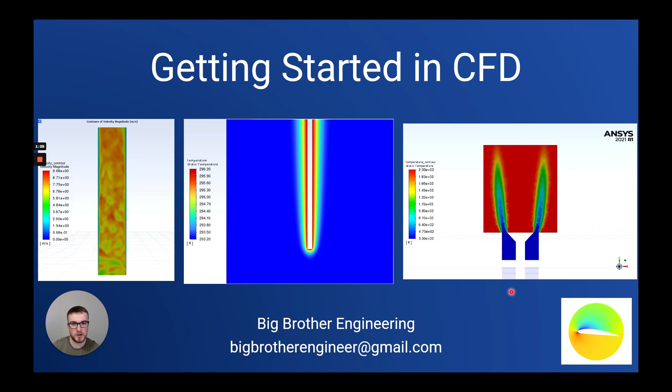So what we're going to talk about today is what CFD is, the process of reducing a real life problem that you see in everyday life into a CFD problem. We'll talk about how the finite volume method works and how we obtain results using it. We'll talk about some applications of the technology, even though they're so wide it's hard to name them all. We'll talk about some of the errors involved in reducing a real life problem into a CFD problem. Then we'll talk about what you need to know to enhance your CFD career, and where to start in your CFD journey, whether you're a beginner, someone who's run a couple of simulations and doesn't know where to go next, or someone who's run multiple simulations and needs further knowledge in a particular area. So we'll talk about what I'd recommend as a process for further enhancing your knowledge in CFD.

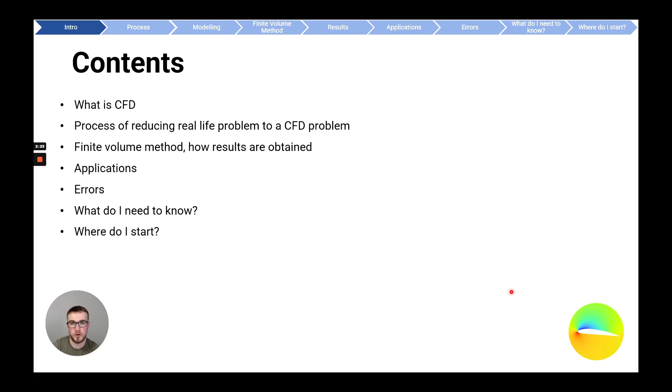As an introduction for complete beginners, CFD, or Computational Fluid Dynamics, is the process of solving a fluid dynamics problem by dividing it into discrete volumes, in other words, cells. Imagine every fluid flow is governed by a field - a velocity field, a pressure field - where we have a solution at every continuous point. Instead of trying to solve for the velocity, pressure, or other quantities at every single point, we divide the domain into chunks and solve it at discrete points. So rather than solving for the whole fluid solution, we divide the domain into little chunks and solve the quantities of interest at these chunks.

The center of these cells are called nodes, and this is typically where we get our solution for finite volume techniques in general, at the cell centers. So what CFD does is take our domain, divide it into little chunks, and use the finite volume method, a numerical method, to solve for the quantities of interest at the cell centers.

You may have heard of the finite element method before, which is often used in structural mechanics to solve FEA problems. The difference between FEA and CFD is that FEA typically solves the equations at nodes at the edges or corners of the cells. The reason we use the finite volume method in CFD over the finite element method is that in the finite volume method, all quantities are inherently conserved directly. What I mean by that is we integrate the equations over each individual cell to ensure that mass, momentum, and other quantities we want conserved are conserved, and this is important for fluid flow problems. So this is typically why CFD applications use the finite volume method over the finite element method - quantities of interest are conserved in the cells, which is a big advantage for fluid flows.

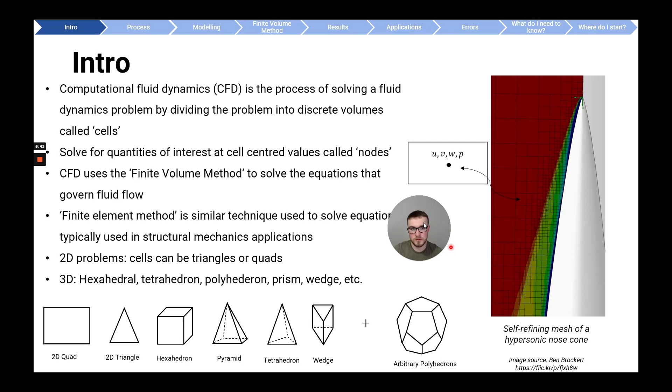Okay, so what is the process of taking a real life problem and reducing it into a CFD problem? I really like going through this process in my head because it helps me ensure that I'm understanding what the CFD problem is actually solving. I'd encourage you to go through this process yourself, take a look at everyday examples you see in real life and ask yourself how you could reduce that into a CFD problem.

So here is an airplane wing. If we want to reduce this real life problem into a CFD problem, there's a couple of steps we have to take. Of course, this airplane wing is very, very complex. We have unsteady flow, we have trailing edge vortices at the edge of the wing. If we take a look at the geometry, it's very complex with lots of nuts and bolts. So we're going to make a lot of simplifications and assumptions in order to reduce the problem into something a little bit easier to solve.

So we'll make modeling assumptions, geometry simplifications, and some simplifications on the boundary, such as constant velocity and pressure, in order to simplify the problem into a model problem. A model problem is something you can conceptualize in your head or draw on a piece of paper with a pen, and it's typically a real life example just reduced down to something a little bit more simple.

Typically model problems are what you would solve in university, etc., where you would assume maybe steady flow, reduce the geometry to something more simple, reduce the forces into particular components that are easy to solve. So a model problem is something you can imagine in your head, a concept, or draw on a piece of paper, and this is a simplification of reality.

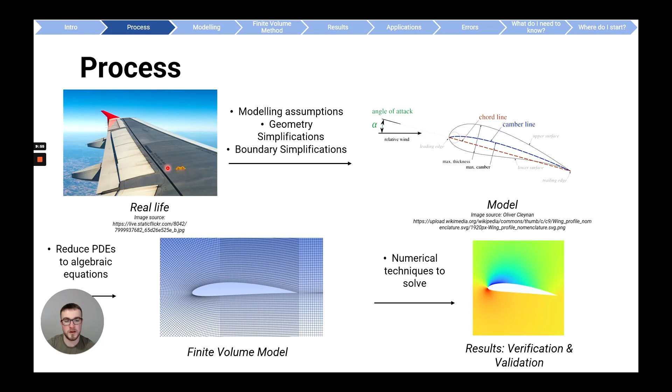So you can see there's a lot of simplifications and assumptions involved in going from a real life problem all the way down to a CFD problem, where in this case we have a 2D airfoil representing a real life airfoil. So there are lots of assumptions and simplifications made in the process of going from a real life problem down to a CFD problem.

So let's talk about the modeling process.

So the modeling process is where we take our real life problem and make some simplifications. We neglect things that might not be as significant in the flow or environment, and we reduce it down into our model problem that we might conceptualize in our head or draw on a piece of paper.

And model assumptions might be, for example, assuming steady flow. So if an airplane is flying at constant speed, it would be a pretty good assumption to assume steady flow, that at time 10 seconds and at time 100 seconds, the flow is going to be pretty much the same on this airfoil, so we would assume steady flow.

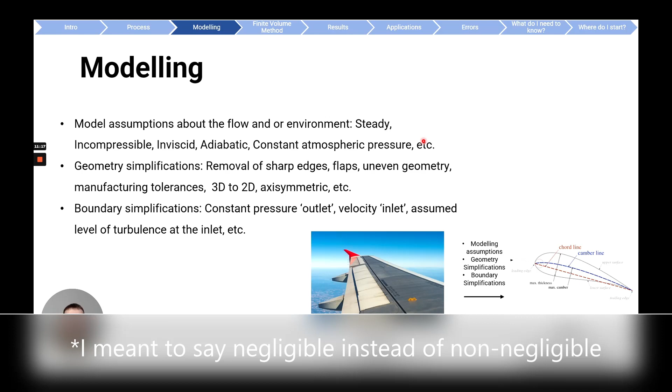Other examples would include incompressible flow if there's no large density changes, adiabatic flow if there's no large temperature gradients and no heat transfer, inviscid, etc. So this is essentially the process of taking negligible effects and reducing that into our model problem - steady flow, adiabatic, etc.

We also have some geometry simplifications that make the problem far easier to solve. So for example, if we look at the airplane wing with all the complex structure here - the flaps, the nuts and bolts, other parts attached to the wing, the aircraft engine - if we were modeling this in CAD, we might just model this wing as a flat piece, nice and smooth, just to simplify the problem and make it far easier to solve.

So we might remove some sharp edges, flaps, uneven geometry, and we'll neglect manufacturing tolerances. If the geometry is symmetric, we might make an axisymmetric geometry, etc. So we will reduce the geometry from something complex into something a little bit more simple in our model.

And lastly, we'll make some boundary simplifications. So typically in CFD, you use a constant velocity inlet, which would have a constant velocity at some point upstream of your part, and a constant pressure outlet. These velocity inlets and pressure outlets will assume constant pressures, constant velocities, and constant levels of turbulence.

So this is some simplifications about the surrounding flow and the boundary conditions around the flow that'll make solving the problem just that little bit easier.

So how do you decide what assumptions you can make if you're taking a real life problem and reducing it into a conceptual model? What assumptions can you make? I would highly recommend asking yourself: what is the output of your simulation? That will help you in determining what assumptions you can make.

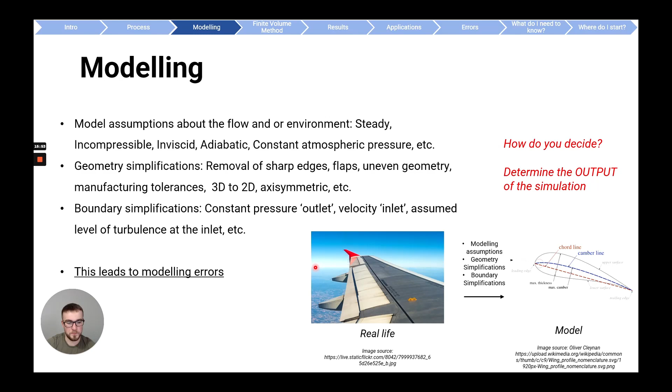Okay, so once we have our conceptual problem, which we might have thought about in our head and drew on a piece of paper, then we have to reduce it into a finite volume problem. So how do we do this?

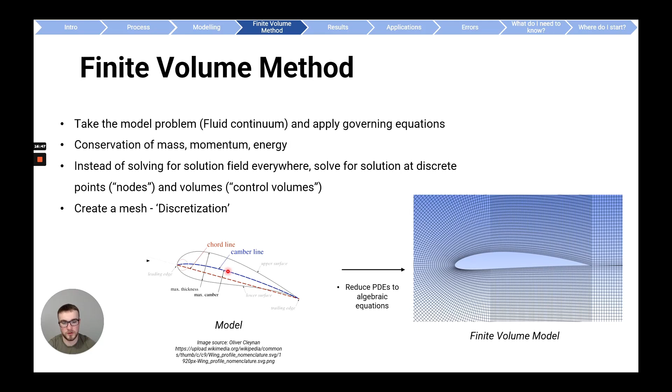We discretize the domain into small chunks. We take our fluid continuum and apply the governing equations to each of these little chunks—this is the process of CFD. Instead of solving the solution field everywhere, we solve it just at these discrete control volumes. This process of dividing the problem into little chunks is called meshing or discretization, where we reduce the partial differential equations into algebraic equations.

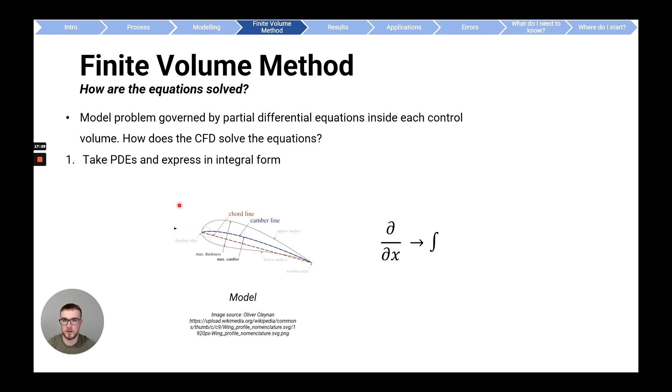So how do we get results out of our finite volume solution? The goal is to take our partial differential equations and create a set of algebraic equations. We do that by taking the equations that govern fluid flow—the Navier-Stokes equations and the continuity equation—and converting them into integral format.

The next step is to integrate these governing equations over each cell volume to form a set of algebraic equations. This is what makes the finite volume method conserve quantities, because we integrate the governing equations over each cell, ensuring that momentum, energy, and mass are conserved in that volume.

By integrating the equations over each cell volume, we now have the governing equations in integral form, and these integral equations are exact—they give the same solution as the partial differential equations. But once we have the integral equations, we can reduce them into algebraic equations.

When we take the integral equations and reduce them into algebraic equations, this introduces what's called the discretization error. This is the error involved in taking partial differential equations and integral equations that govern a field and reducing them into solutions at just singular points or singular cells.

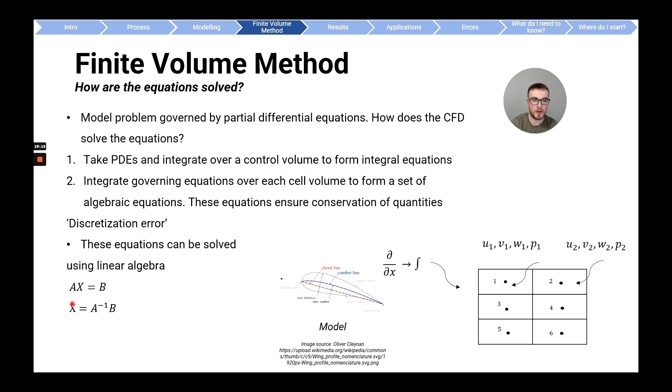The reason we change the governing equations into algebraic equations is so we can use linear algebra and much simpler mathematics to solve them. But before we can solve these algebraic equations—for example at node 1, node 2—there are more complexities to deal with. One main complexity is that the governing equations for fluid flow are actually nonlinear.

So we have our set of algebraic equations, and these are going to have u squared, v squared terms, and cross terms such as u times v, which need to be dealt with before we can solve the set of algebraic equations using linear algebra.

To solve for these nonlinear terms, we use the Newton-Raphson method—you may have done this in university in a numerical methods course. Essentially, the process is to take an initial guess value and add on a certain change to that guess, then calculate what the residual is—in other words, how close were you to the actual solution?

This is an iterative process. For any nonlinear term we want to solve, we make a guess value, substitute it into our equation for the Newton-Raphson method, and check how close we were to the actual solution. If we were too far off, we take our new value and iterate again, and again, until we're close enough to where we want to be.

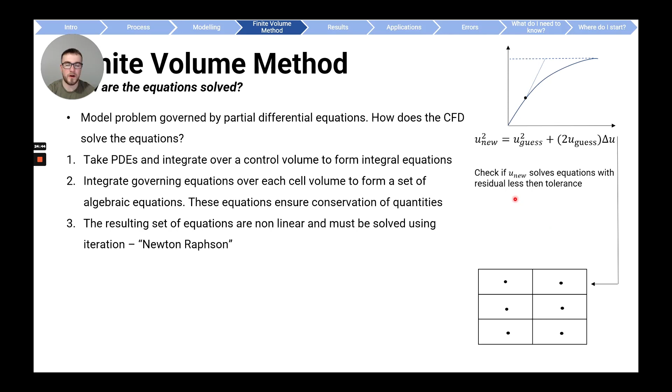So we sub our u new value into the cells and we determine if the solution is correct or not, or how far off it is. And how far off we are is called our residual, and you will have seen this in CFD when you see your residuals converging or possibly diverging when you're solving a solution.

So we take our u new value, we sub it in here. Let's say for example our equation was ax squared plus bx plus c equals 0, and that's our solution, with a tolerance of 0.001. In your CFD simulation, you'll set the residual tolerance typically at 0.001 as standard, but you might change it to 1e-6 if you want a more accurate solution. So if 0.001 is our tolerance and we sub our u new squared value into our governing equations and we get 0.01 here, then we have to iterate again because it's not within the tolerance we've set. So we iterate again, we get 0.09 for example, then say we get 0.02, until finally we stop iterating once the residual value drops below our tolerance.

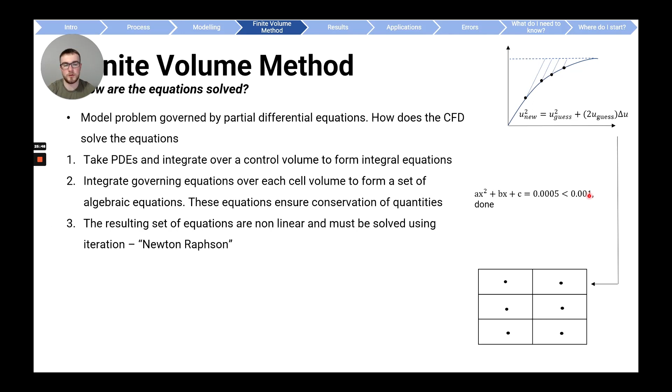So that's how the nonlinear terms are solved for in the finite volume method. Once we've taken our partial differential equations, changed them into integral form, which is equal to the differential form, then taken that integral form and changed it into a set of algebraic equations, and once we deal with the nonlinear terms, then we have everything we need to find the values at the cell centers. So that would be values of u, v, w, and p, and possibly more quantities if you're solving a more complex solution.

And once we have these cell center values, then we can get our contour plots. We get these contour plots simply by post-processing the results of these u, v, w, and p values. And I think this is another important thing to note: in CFD, we're not solving a set of equations that gives us our color plots directly. This is simply a post-processing of the u, v, w, and p results at the cell centers. So this averaging, for example, is just averaging over cell centers. The contour plots are not a direct output of the equations - only the cell centers are.

Everything else that you see or calculate, maybe the lift coefficient or drag coefficient, is a function of what values you calculated at the cell centers. So if you haven't calculated your cell center values accurately, everything else will be off.

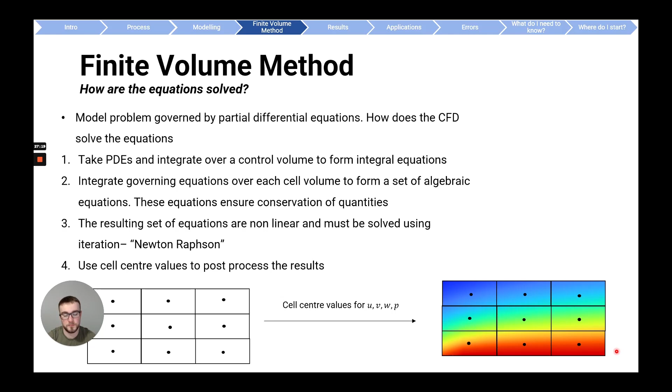So then once we get our contour plots and our results from our CFD, we have to verify and validate the results. Verification of the results is comparing our CFD solution that we see on screen to the model problem that we conceptualize in our head and can maybe draw on a piece of paper, for example. This might be comparing velocity at a certain point in the flow that we know from our model problems, such as looking at the velocity at the inlet, or checking if the no slip condition is verified at solid walls, for example. So verification is comparing our conceptual model problem to our CFD problem result on the screen.

And validation is a little bit different. Validation is when we compare our CFD results to reality. So we might conduct an experiment, for example, and validate that the CFD that we're seeing on screen is representative of reality.

Validation is comparing the CFD results we see on screen to actual reality. Verification is understanding if our CFD problem represents the model problem that we conceptualized and created that finite volume model from.

The important thing is that the main value in CFD is in qualitative results over quantitative results. We're not looking to get the exact lift coefficient or the exact temperature at a particular location, but to see if the CFD model follows the trends we'd expect. If we increase the angle of attack, does the lift coefficient go up as expected? If we change flow velocity, does temperature change in the right direction? If we change the geometry, do lift coefficients and velocities go up and down accordingly? It's about trends, not exact numbers, and this gives us valuable insights.

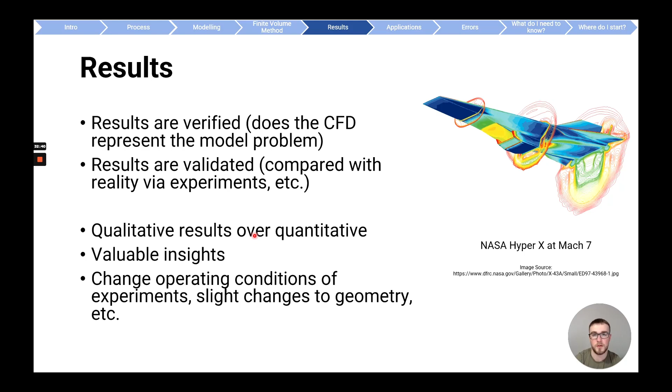So, some applications of this technology. The applications of CFD are growing every day, and there are so many to date. The most popular by far is aerodynamics and hydrodynamics—anything involving fluid flow using air and water, such as aerospace, aeronautics, sailing, etc. We also have turbo machinery, compressors, pumps, and gas turbine engines in industrial applications or aircraft engines.

Combustion applications—there's huge value for CFD in reducing emissions and reducing combustion instability in different engines. We can do force analysis, taking a wind turbine or pump, evaluating the fluid flow over it, and calculating the stress in that component. And heat transfer has a lot of applications here too.

As electronics parts get smaller and smaller, the heat flux goes higher and higher because the cross-sectional area of components like the CPU is getting ridiculously small. So the heat flux over these components is very high, and cooling these applications uses CFD quite a lot to improve design. A few more examples: heating, ventilation, cooling, biomedical, marine, and many more not mentioned here.

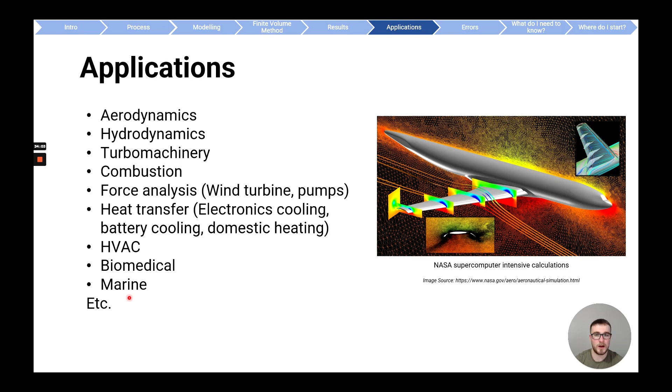Let's talk about the errors involved in going from a real life problem into a CFD problem. The first set of errors is modeling errors. When taking a real life problem and creating a model problem, such as a CAD model and conceptual model, we're not going to accurately capture the geometry in full, or if we do, we'll likely make simplifications to make solving the problem easier—inducing modeling errors. We also have modeling errors from assumptions made about the flow or environment, such as steady, adiabatic, and boundary simplifications.

These are all modeling errors in taking a real life problem and creating a conceptual model. Then in going from a conceptual model to creating a finite volume model, we introduce more errors. We have our discretization error, which is taking the field equations that govern this whole fluid flow and reducing it into just the solution at particular chunks, and that's our discretization error.

We also have our linearization errors. We have nonlinear partial differential equations that we're going to use the Newton-Raphson method to linearize, so we can solve them easier, and this introduces a linearization error, which is reflected in the residuals in CFD.

And then when we have our set of algebraic equations to solve, we're going to have more errors from the computer, such as computational errors due to the fact that we're using floating points in the computer, some numerical errors, and also user input errors.

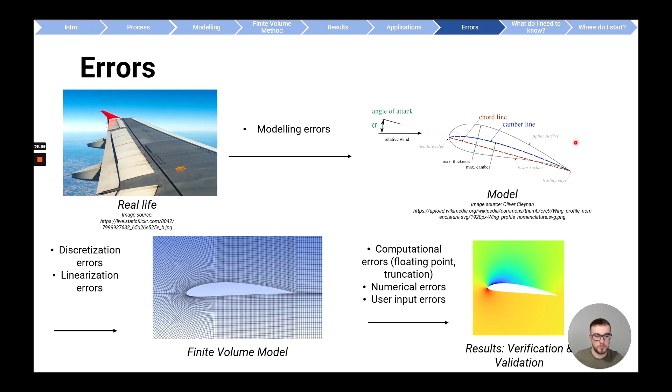I've done this many times myself, to run a simulation and simply use the wrong velocity, or forget to turn on heat transfer, etc. So we have lots of user input errors in taking the user that's using a CFD finite volume model and trusting that they've done everything to conceptually model this in the correct format. So there are user input errors involved too.

So if you're a complete beginner and you just want to know, okay, I want to get started with CFD, what do I need to know?

The first thing you definitely need to know before you get started is the basics. Any university introductory course to fluid dynamics or fluid mechanics, to learn about Newton's law of viscosity, to solve some simple problems such as flow over a flat plate, flow in a pipe with some friction factors, Bernoulli's equation—these basic concepts of fluid flow and generally how fluids behave. You absolutely need the basics before we can move to these complex problems with CFD.

Then we need to know about problem definitions. We need to know about the different methods and what level of detail we need to model our problem. In order to understand this, we need to know about the conservation equations, and we need to know about turbulence and turbulence modeling. This will tell us in what level of detail we need to solve our problem.

On the right hand side here, I have an image of a DNS of a flame, a direct numerical simulation. This is a turbulent flame where the solution solves for every single length scale of eddies—all the small eddies, all the large eddies—and you can see the level of detail in this simulation.

For example, if we did a RANS simulation of this flame, we would get a mean flow over this whole flame where everything would be averaged out and a much more smooth contour, such as the images I showed in the first slide. So we need to know what level of detail we're going to solve here and what's important to us.

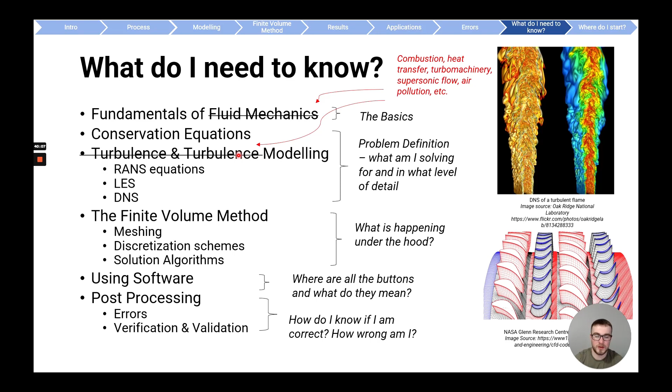And of course, if you're doing any specialized applications such as combustion, heat transfer, turbo machinery, supersonic flow, you'll need to know the fundamentals of this specialized area and probably how different equations are modeled in this area. So for example, if you were doing combustion, you would need to know the fundamentals of combustion, and you would also need to know the combustion modeling equations and how combustion is modeled in CFD as well. So that adds some extra complexities into CFD if you're doing any specialized applications.

Okay, so now that we've covered what you need to know, let's talk about where you should start. Most people start here at the very basics. They've done a fluid mechanics course in university, or done a couple of model problems, for example, and most people start here, and that's good.

So we take our... this is a book I highly recommend for anyone doing the basics, Fundamentals of Fluid Mechanics. This will just teach you how to solve some simple fluid problems with a piece of pen and paper, or with a calculator, and that's the basics to understand fluid flow and how fluids work.

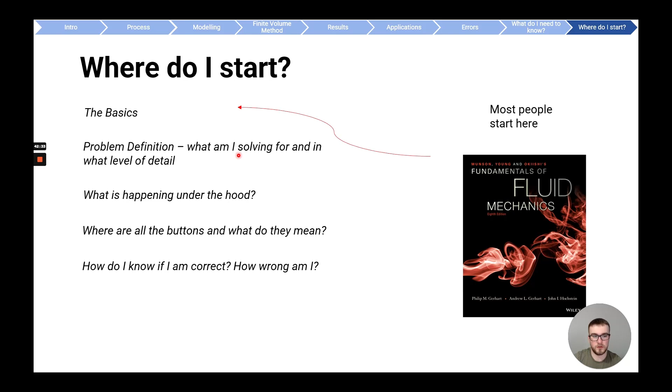And then most people in the university course start with the basics and then go to something more complex straight away. So you go straight to a CFD solution. You might get an assignment, for example, and then you'll move to where are all the buttons and what do they mean. That's all you want to know is how do I use ANSYS?

How do I use star CCM plus? How do I use OpenFOAM? And you get your contour plots and you get your assignment done.

And then when doing your assignment, when doing your first CFD simulation, you might just delve a little bit into problem definition. So you might understand what you solved for. Okay, well, I assume steady flow, and I ignored viscosity by using an inviscid flow, etc. So you'll delve a little bit into problem definition too.

And you might do a small bit of error estimation too, where you take the results you got from your simulation and compare it to some experimental data or to some results from the literature, for example.

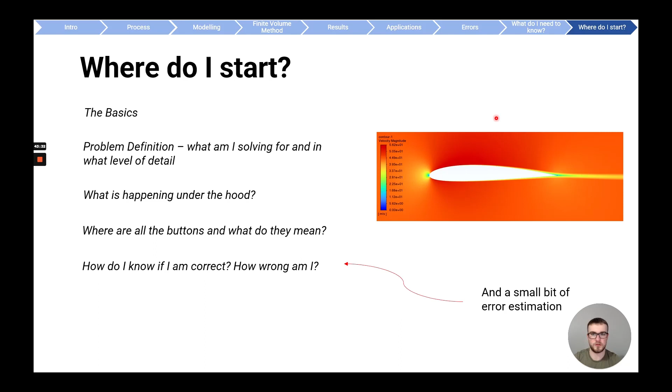And then most people stay here in this kind of cycle of where are all the buttons and what do they mean? How do I use ANSYS? How do I simulate this? How do I use star CCM? How do I conduct a certain simulation?

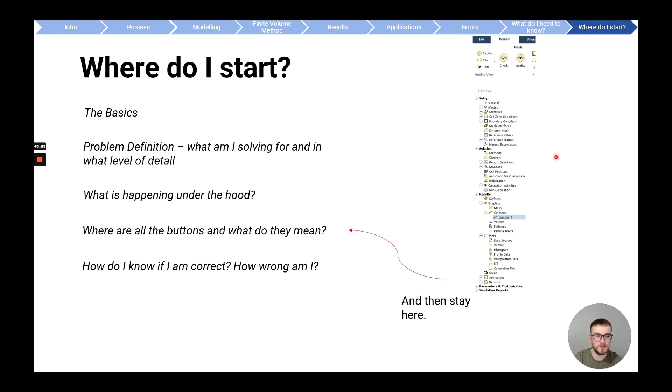I highly recommend that you don't stay at this stage where, after you've run a couple of CFD simulations or your first simulation, you just focus on a particular software. What I recommend is going through these 4 branches here and dabbling into problem definition and really understanding what you're actually solving for and in what level of detail. And then taking a look at what's happening under the hood, the finite volume method, discretization, what's actually happening in the computer.

A little bit into where are all the buttons and what do they mean - you might have a look at a user manual and have a look at the different options you can use in a software, and having a little bit of a look at error estimation and how to improve maybe your mesh quality or your results quality.

So any good CFD engineer will delve into these 4 areas, as this is what makes a good CFD engineer that can use any code, and it really cements your understanding when you understand these 4 areas in detail and then advance into even further areas of CFD.

And also I've noted here that learning one of these areas will complement another area. So I have an example here: if you understand the assumptions that you make in a problem, it will help you verify and validate your results. So if you know that you've assumed a steady flow, then you'll know you can verify and validate your results against steady results where there's no vortex shedding, for example.

Another example would be if you understand what's under the hood and how the finite volume method works, it's going to be far easier to understand the different buttons in ANSYS and what they mean.

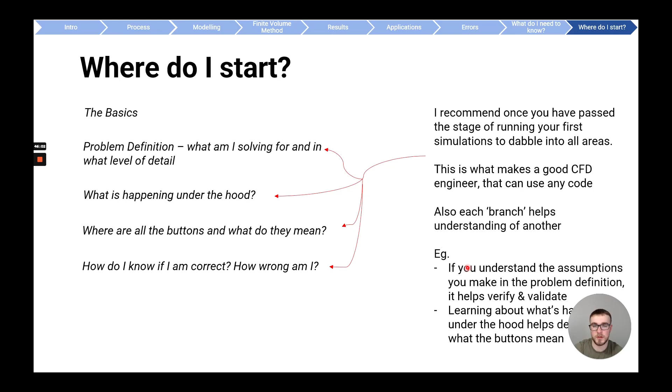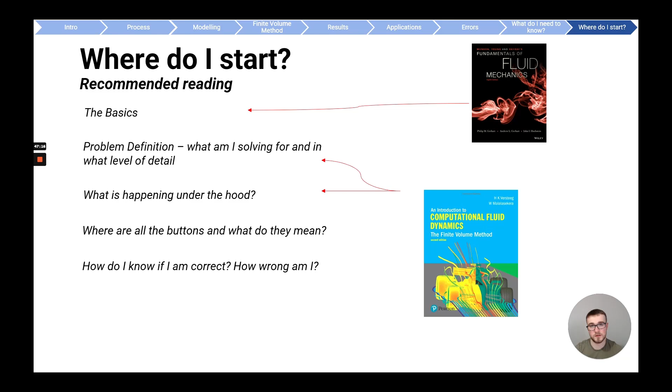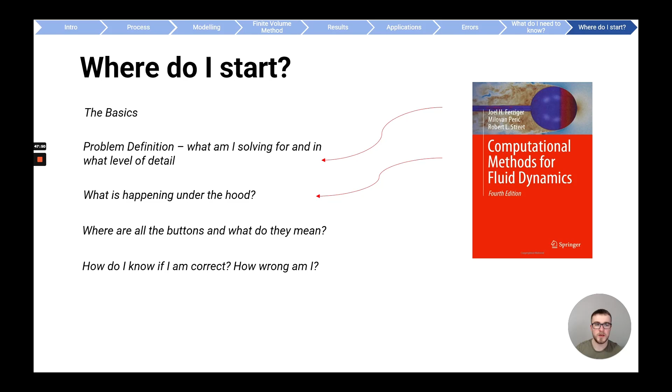Then if you want to go even further and understand more than an introduction, this is a great book by Ferziger, Computational Methods for Fluid Dynamics, and this will help you understand even more, especially after having a look at the previous books, in terms of the problem definition, what you're actually solving for and in what level of detail, and what's happening under the hood—some more about the finite volume method, some more details about how solutions are actually solved, about meshes and how that affects how the solutions are solved, etc.

And then for where all the buttons are and what they mean, I would recommend going to the manuals for maybe ANSYS or Star-CCM, and OpenFOAM have great resources out there.

With my channel, what I hope to do is give some tutorials here to show you how to use the software and get going with practical examples, because I do think it's important to go from the basics, then run a practical example, then refer to the textbook and keep doing practical examples. So what I hope to do with this channel is provide you with practical examples so you can understand how to use the software, how to get results, and that will motivate you to jump to the textbook and understand what's actually going on here.

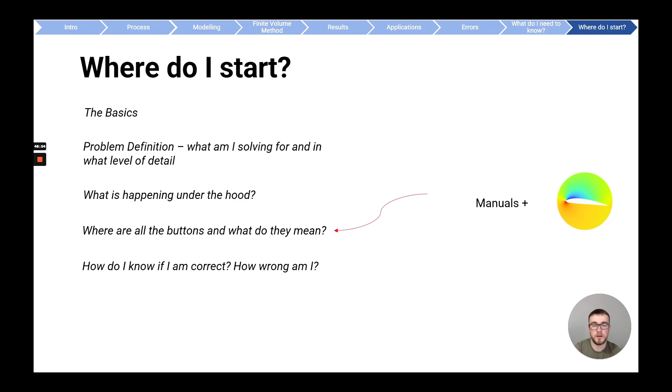While I do these tutorials, I also will be jumping to different areas such as problem definition and what level we're solving, what's happening under the hood. So you'll notice in some of my tutorials I explain, okay, we're using this algorithm for this reason, or I initialize this because of this. I do like to incorporate some explaining of what's actually going on too.

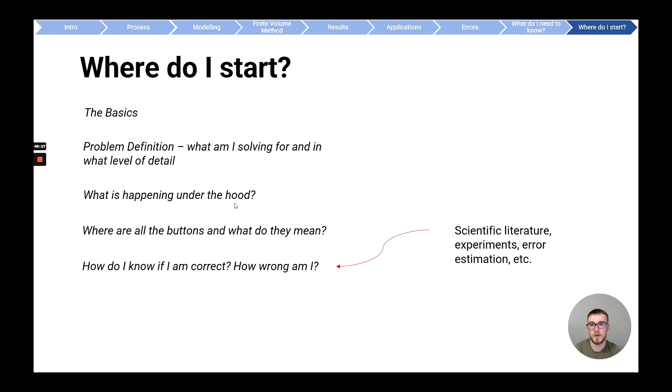And then to determine whether you're correct or wrong, a great way to do so is the scientific literature. So look up on Google Scholar things like lift coefficient of airfoil CFD, or turbulent flame RANS simulation CFD, and have a look at some of the other results that are out there. Have a look at some experiments that were done, and there are some error estimation techniques too that can be used for meshes, for example, and that will help you determine what kind of errors and how correct you are with your simulation.

So in the next video, what I'll go through is the conservation equations—how the conservation of mass and conservation of momentum are derived, for those who have maybe done their fundamental fluid mechanics or a couple of CFD simulations before but aren't sure exactly what's going on under the hood, or what level of detail you're solving your problem in. I'll go through deriving the equations for conservation of mass and momentum, and from that we'll be able to derive the RANS equations, so you'll know exactly what level of detail is being solved for your fluid flow when you run a CFD simulation.